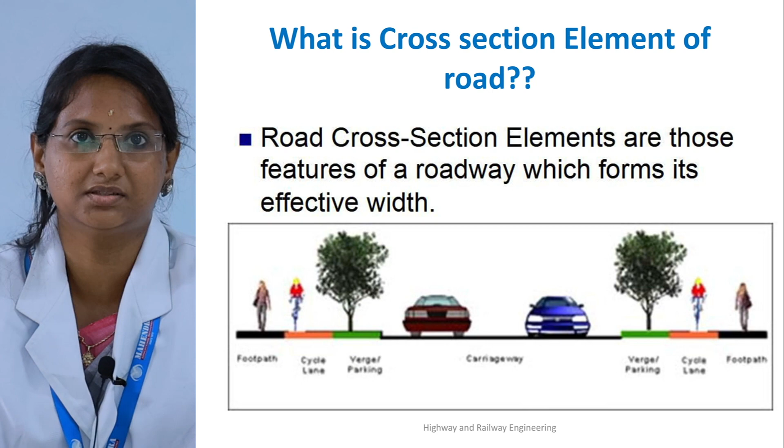Today we are going to discuss highway cross-section elements. First, what is a cross-section element of a road? It is the features of a road which form its effective width. It's termed as a cross-section element of roads.

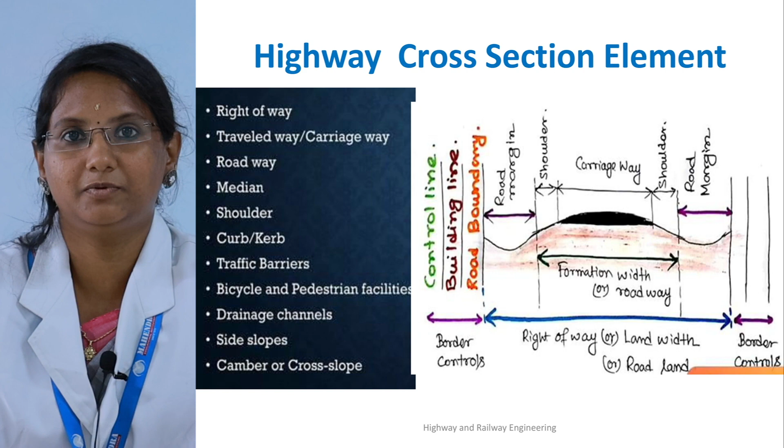There are different components in highway cross-section elements: right-of-way, carriageway, roadway, median, shoulder, curb, traffic barrier, bicycle facilities, drainage channel, side slope, camber. These are the components of highway cross-section elements. The figure shows the cross-section element of the highway. It's a line sketch of the cross-section element. Now we are going to see the components one by one.

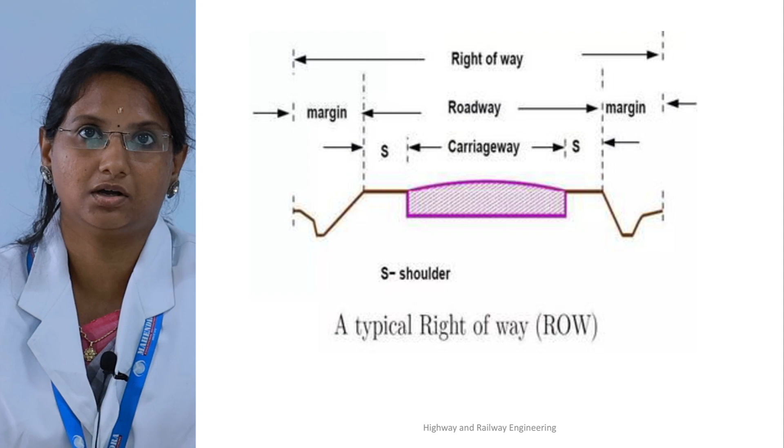First one is the right of way. It is termed as the total land acquired for construction of a highway. The main purpose of the right of way is it accommodates all the cross-sectional elements, and for the future it is helpful for widening of our road and for public facilities.

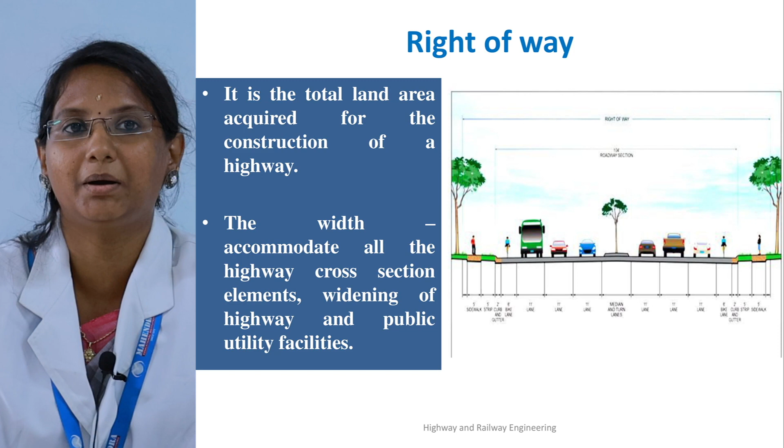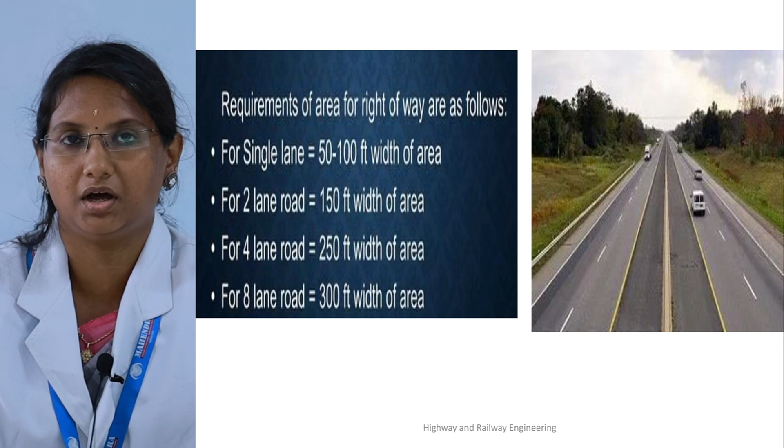As per the IRC, we have the dimension for right of way. For single lane we have 50 to 100 feet width of area. For 2-lane roads 150 feet width is required. For 4-lane roads 250 feet is required. For 8-lane roads we need 300 feet width as per IRC for construction of right of way.

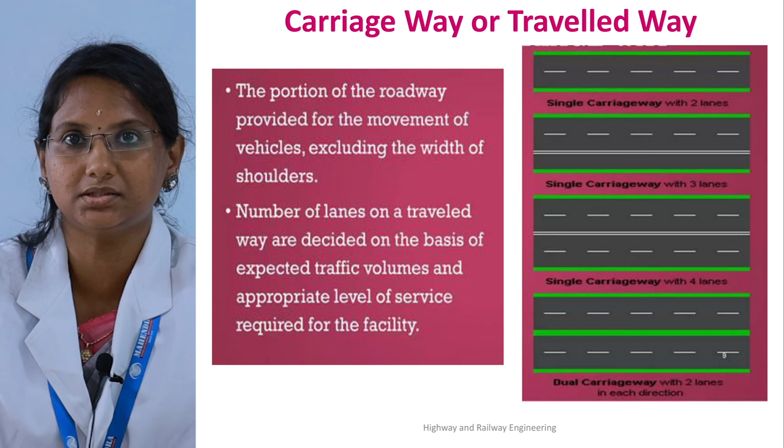The next main component is the carriageway. The main purpose of the carriageway is mobility of vehicles. The place where the vehicles move on a road is termed the carriageway. The number of lanes is decided on the basis of traffic volumes and the service required for the facilities. This picture shows a 2-lane road where vehicles move in both opposite directions.

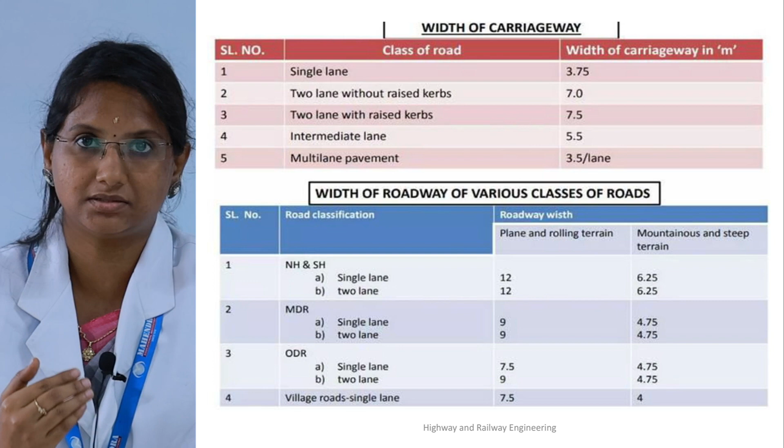As per the IRC, we also have carriageway widths for different lanes. For a single lane road the carriageway width is 3.75 meters. For 2-lane without curbs we provide 7 meters. For 2-lane with raised curbs we provide 7.5 meters. For multiple lane pavements we provide 3.5 meters per lane. Based on the different classes of road we can adopt the width as per IRC.

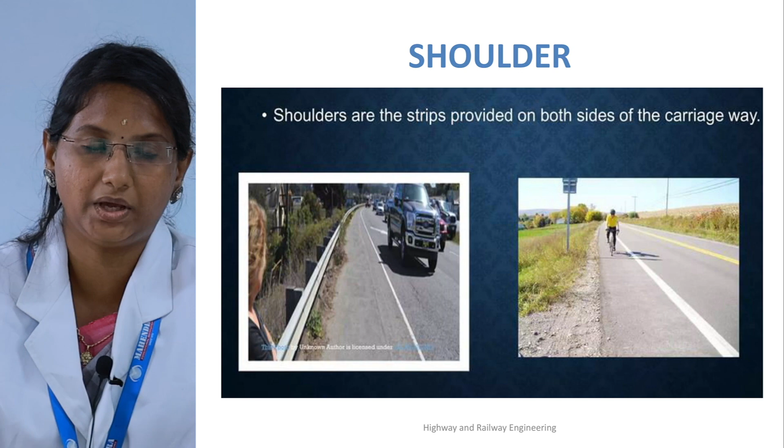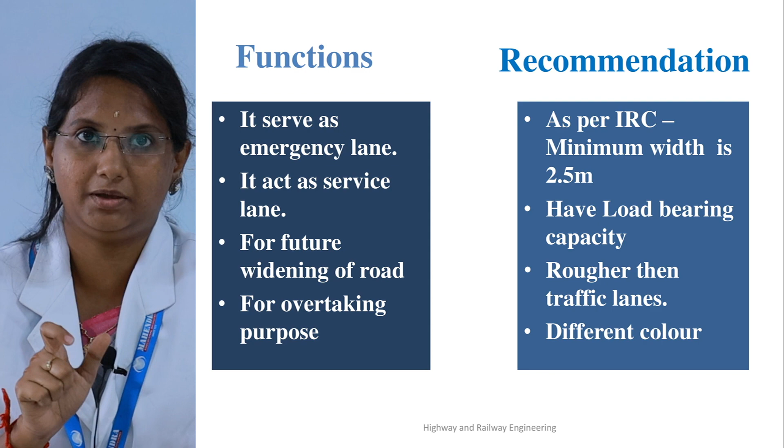The next component is the shoulder. It's the strip provided on both sides of the carriageway. This picture shows the shoulder. It serves as an emergency lane and a service lane, and it also helps for widening of the road and for overtaking. As per IRC, the minimum shoulder width we have to provide is 2.5 meters.

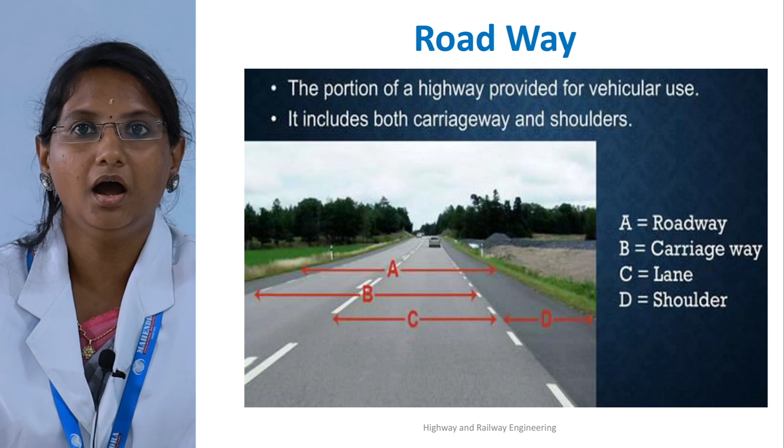Next one is the roadway. It includes both carriageway and shoulder. In the picture, A represents the roadway, B represents the carriageway, C represents a single lane, and D represents the shoulder.

For the roadway width, as per IRC we have different widths for different classes of road based on location, like plain and rolling terrain and mountainous and steep terrain. For example, for NH or state highway in plain terrain we adopt a roadway width of 12 meters.

For mountain or steep terrain, the road width adopted is 6.25 to 8.8 meter.

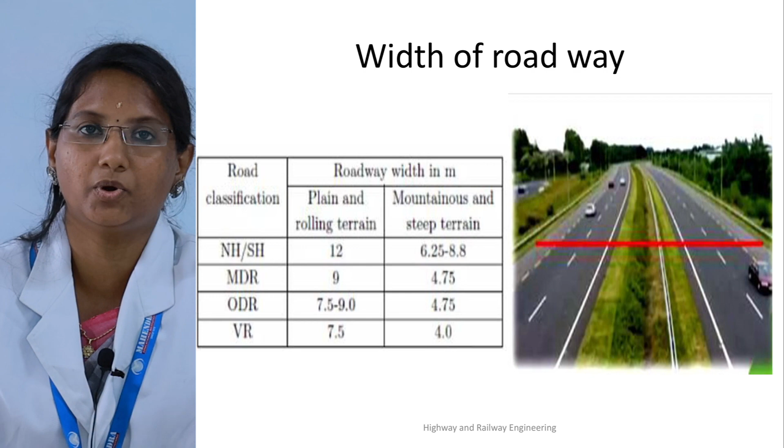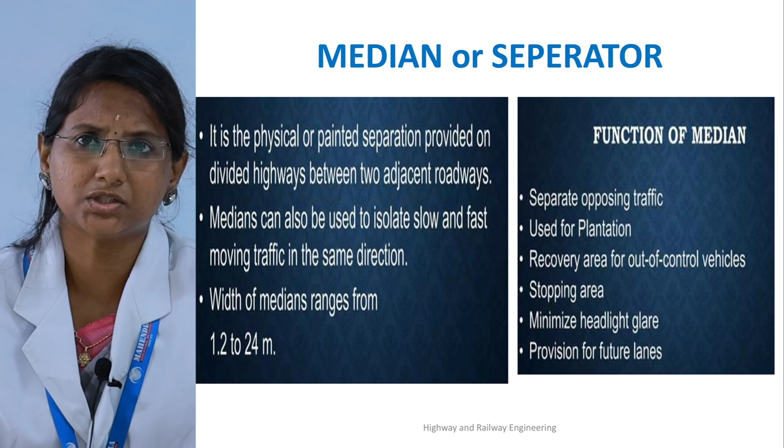Next is median. It's a separation provided between two adjacent roadways, termed as median or separator. The width of the median is usually provided as per IRC, 1.2 to 24 meter. Its main function is to separate the opposing traffic and it's used for plantation, stopping area, and provision for future lane.

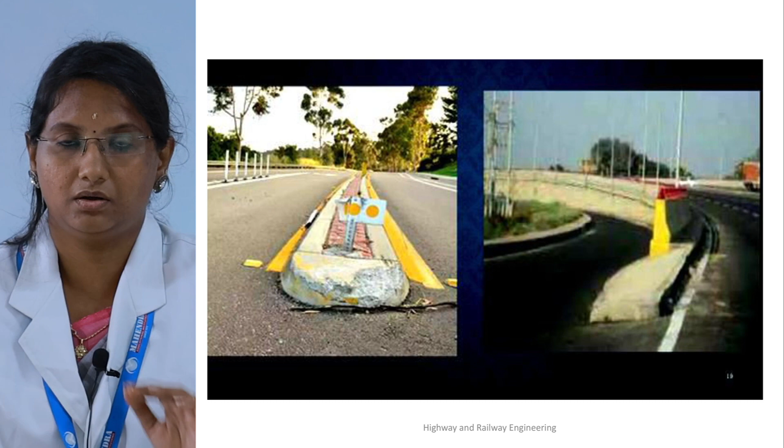So for this purpose we provide the median or separator in the highway. Here are pictures showing the median or separator in highway, and this is another example.

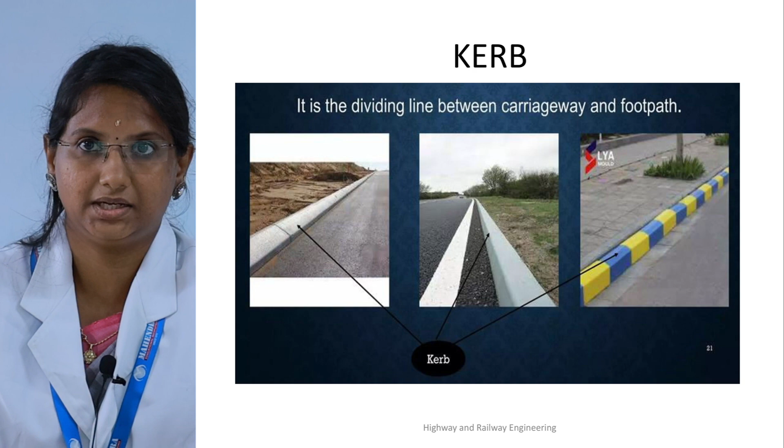Next is kerb. Kerb is a dividing line between carriageway and footpath, termed as kerb. It's just a divider between carriageway and footpath.

Pathway or sidewalk is what people usually use for walking. The minimum width we have to adopt for footpath or sidewalk in highway is 1.3 meter.

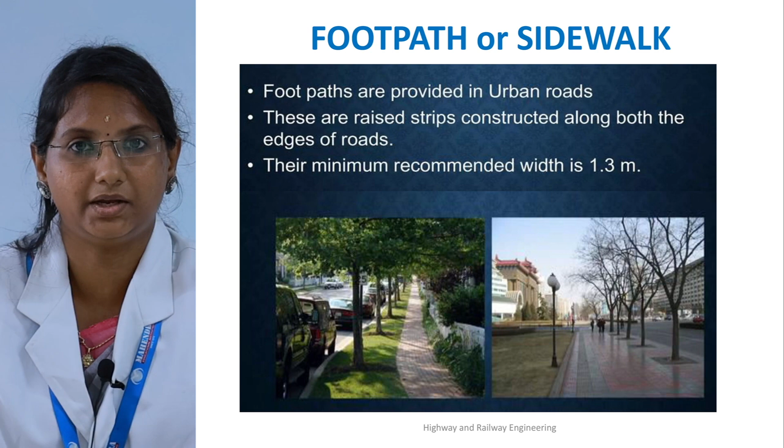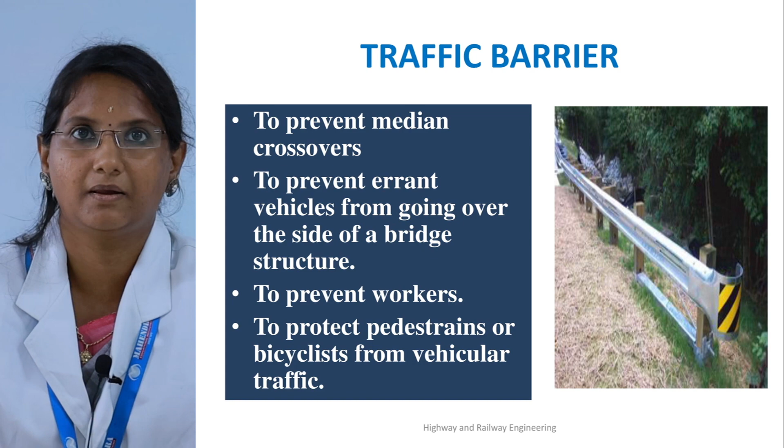Next important term is drainage channel. It is provided along the length of the road. Its main purpose is to drain the storm water which penetrates into the road.

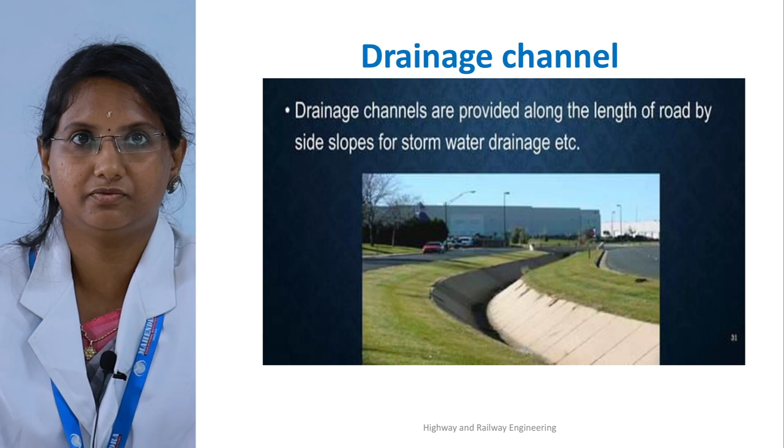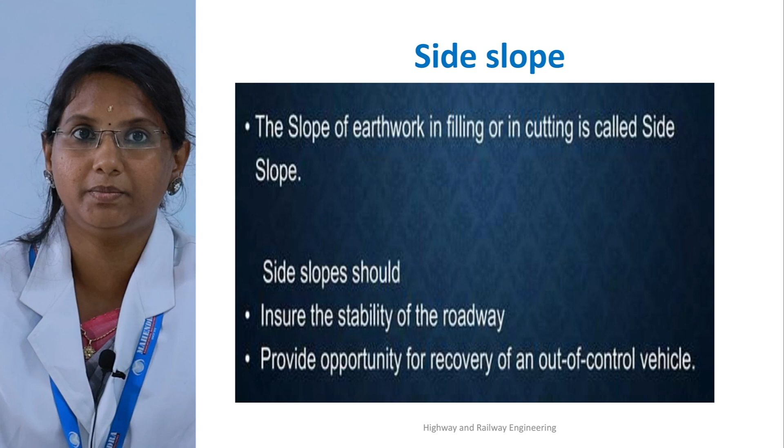Next is side slope. It's the earthwork provided either in terms of filling or cutting. The slope of earthwork in filling or cutting is called side slope. The main purpose of side slope is to give stability to the roadway. Here is an example of a side slope.

Next is cross slope or camber, provided in the middle of the road. Its main purpose is to drain off rainwater from the road surface and also prevent entry of surface water into the pavement. The main advantage of providing camber is it increases the lifetime of the pavement surface. The slope provided in camber is based on 1 vertical to n number of horizontal, and depends on the amount of rainfall occurring at the location.

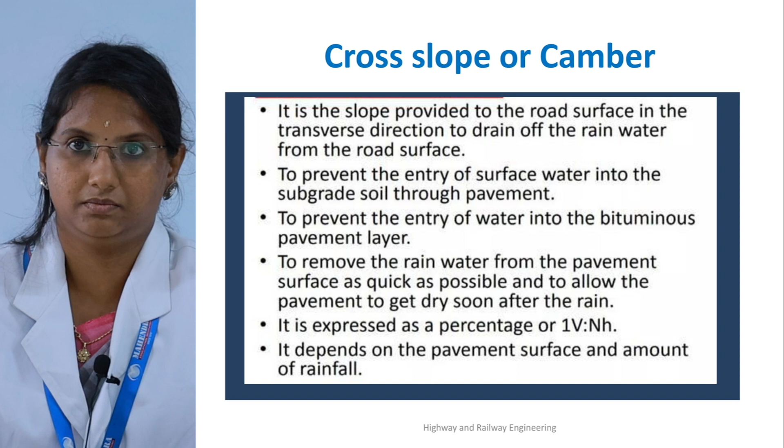This is a picture showing the camber. In camber we have two types: sloped camber and parabolic camber.

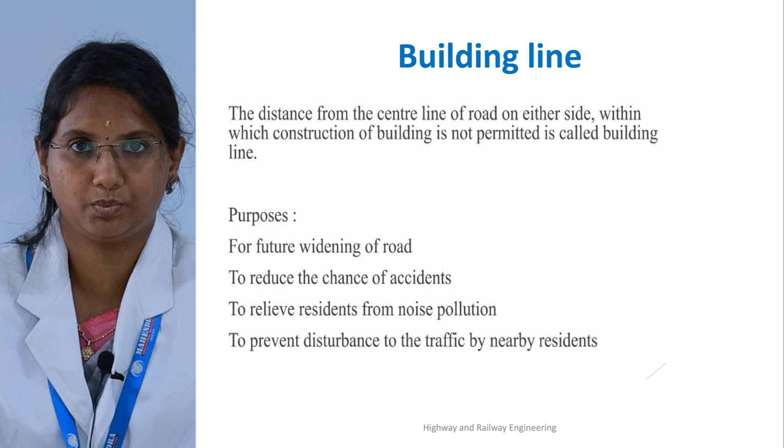Next is building line. It's the distance from the center line within which construction of a building is not permitted, called the building line. The main purpose of providing a building line is for future widening of the road, to reduce the chance of accidents, to relieve residents from noise pollution, and to prevent disturbance to traffic by nearby residents.

The next and last one is control line. It's the distance from the center line to such buildings which cause more disturbance to the traffic, called the control line.

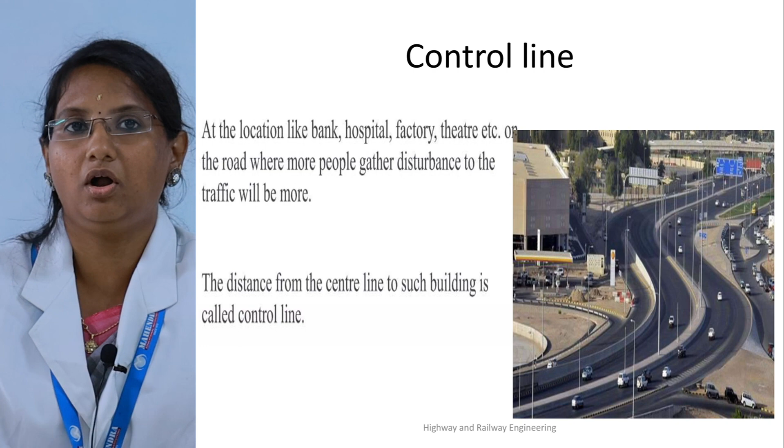The main points to remember in this topic are, for all cross section elements, we have to remember the definition, purpose and functions, and dimensions as per IRC. These are the important terms we have to remember in these cross sectional elements.

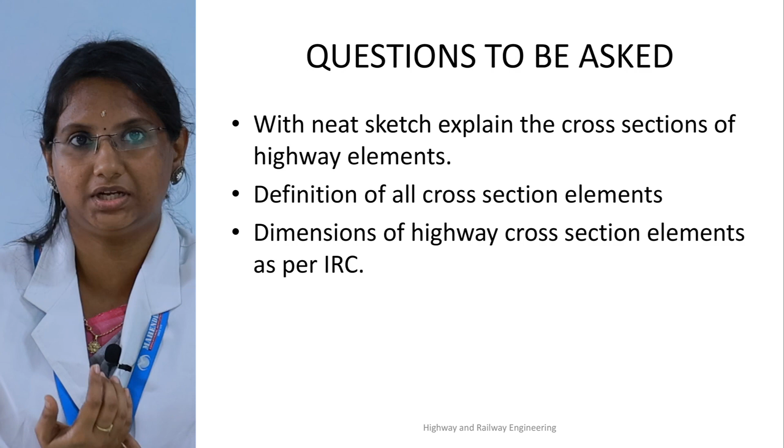These are the questions expected to be asked in the end semester examination: cross section elements of highway, definition of all cross section elements, and dimensions of highway cross sectional elements as per IRC.